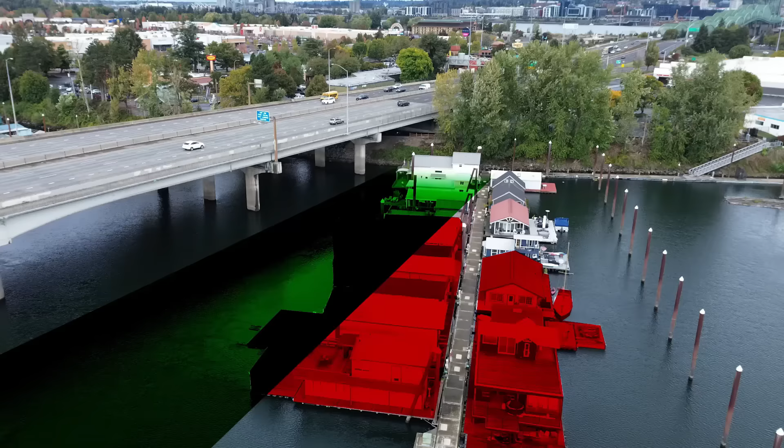I've been all around the country. I had never heard of floating homes until I got here. It's Greg Johnson's job to lead a team who are trying to make the impossible happen: fix Interstate 5 between the states of Oregon and Washington, which is kind of a big deal because 3 million people only have 2 bridges.

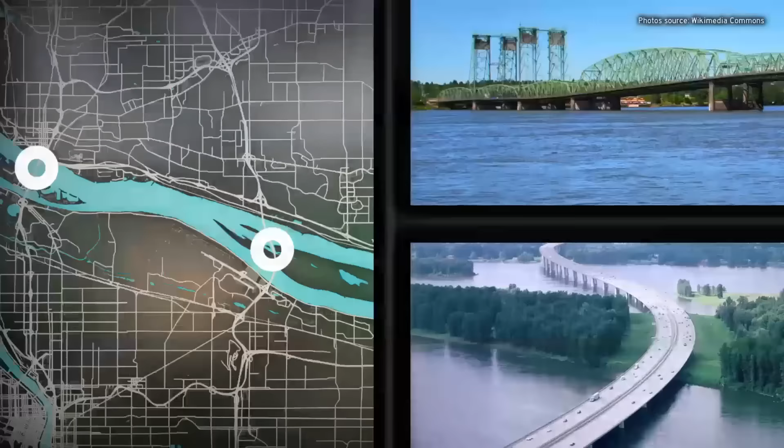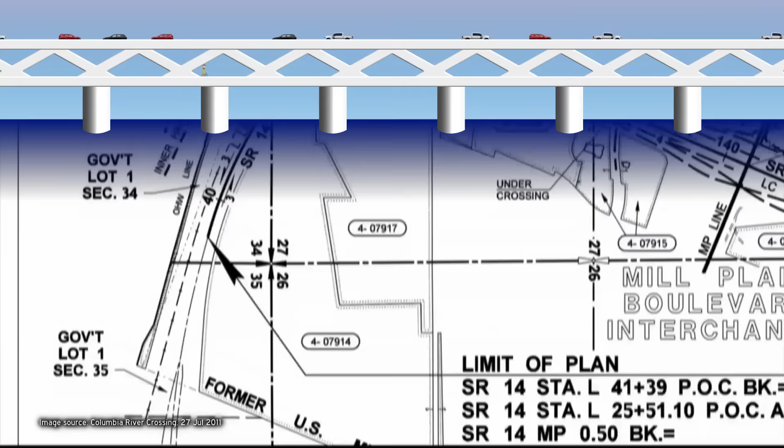A modern one that's about 40 years old that carries Interstate 205, and this one, the I-5 bridge, that just turned 108 years old. And the last time the 2 states tried to replace it, they spent 9 years and $175 million on engineers, architects, geologists, archaeologists, planners, everything necessary to plan out a mega project, only for Oregon to hate the road widening part and Washington hate light rail so much, the state Senate backed out and the whole deal fell apart.

So about a year ago, we talked about all the problems with this old bridge. It might look really cool, but it's not very cool to drive on. Only 3 squishy lanes in each direction, and nowhere to go if you break down. An elevator for tall ships that stops the entire freeway. And if you try to avoid traffic and take your bike, this walkway is not great, and Portland's giant light rail system is stuck at the shoreline. So anybody living on the Washington side pretty much has to drive.

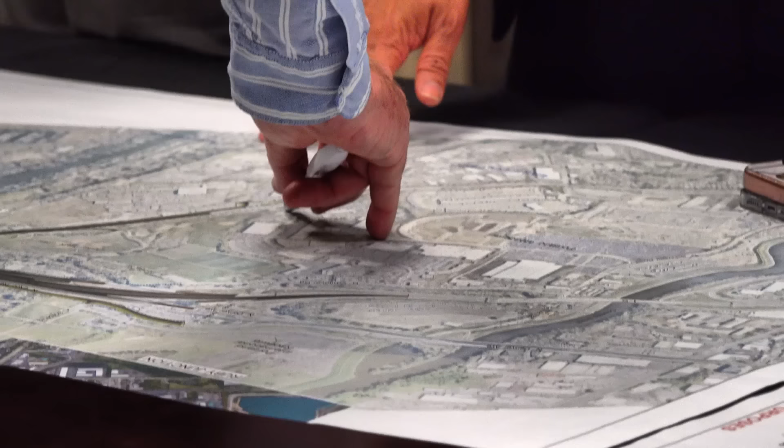2 states divided by a very large river, communities that see themselves somewhat differently. So here we go again. Can Portland and Vancouver bridge their differences with a little help from the team committed to make sure history doesn't repeat itself? This is the 20-year story of 2 states trying to replace this old bridge, and why this time might actually happen.

Our problem is they are right next to the interstate. The Jantzen Beach floating home community is just one of hundreds of issues a mega project has to sensitively deal with if they want to get the project built. Jantzen Beach here on Hayden Island has kind of gone out of business twice. The island sits in the middle of the Columbia River, just off the Oregon shoreline. A century ago, right over there was the Coney Island of the West.

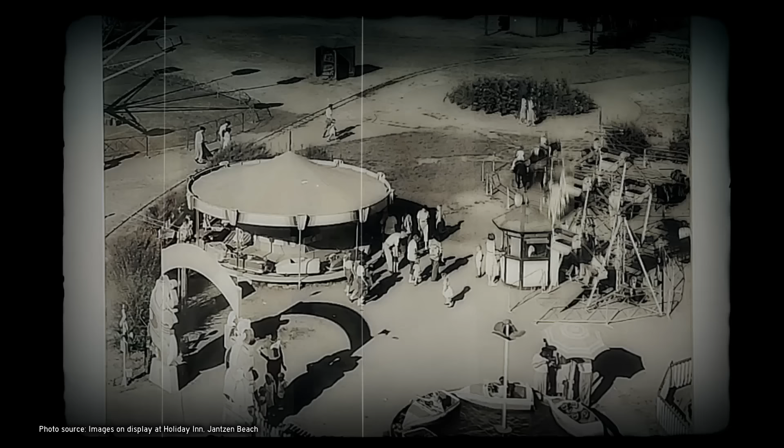During the 1930s, 25,000 people a day would come to ride roller coasters, and by the 1960s, Interstate 5 rolled right past the front door, which meant the only way on and off the island was the freeway. Floods, fires. By the 1970s, a shopping center developer tore it all down and built a big enclosed mall over there. But even it's now gone out of business. Blame it on the traffic, I guess. Today, it's a big box development, but one that's starting to see a little bit of vacancy itself.

So if you're going to build a multi-billion-dollar highway project that runs right through the middle of the island, now's the time to get it right. Sort of a make or break, so Jantzen Beach doesn't go out of business a third time.

Well, now it's 4:07. You get traffic and weather.

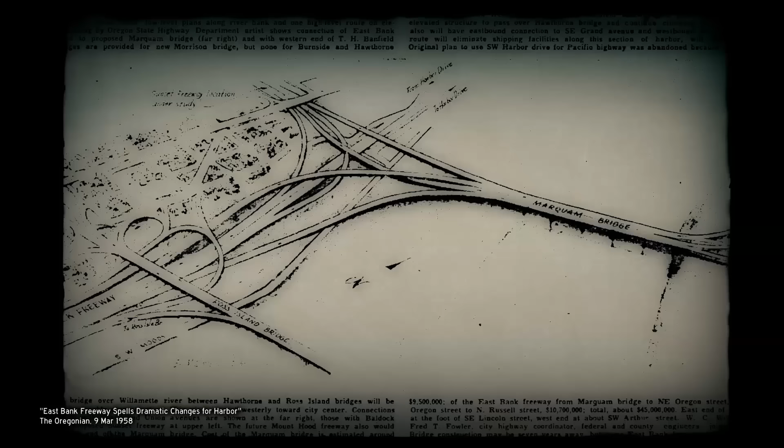People say, well, my voice doesn't matter. They're going to do what they're going to do. This used to be true. Before 1970, one small team of engineers could just draw a line on a map, and construction crews would start building. But history has shown us that when a small group of people just do things without any input, they usually end up making some colossal mistakes.

So Congress passed a law that said, hey, taxpayers are footing the bill. They should have some say on what gets built. If you make changes to a road and there's federal money involved, rules say you have to document the impacts. They call that an environmental impact statement. And I just saw this on the side of I-5. Public comment period open. Getting involved with the community and finding out what they want. If you're doing the project right, it's a lot more than just a formality.

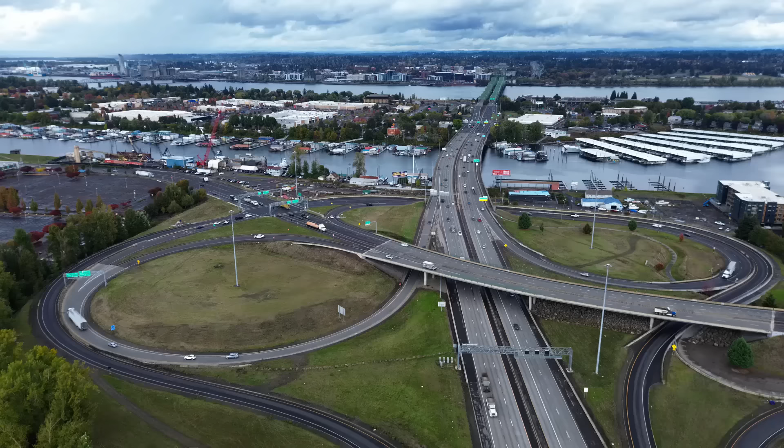So a decade ago when Oregon and Washington tried to build a bridge, the design had it landing on Hayden Island and spreading out to 22 lanes, which is a little eye-opening for the residents. Thankfully, public involvement picked up on this. We listened. They said they wanted a smaller footprint, and they also wanted a way to access the Portland street grid without going on the freeway. So through small meetings and big ones like this one, residents worked with the team to redesign the interchange.

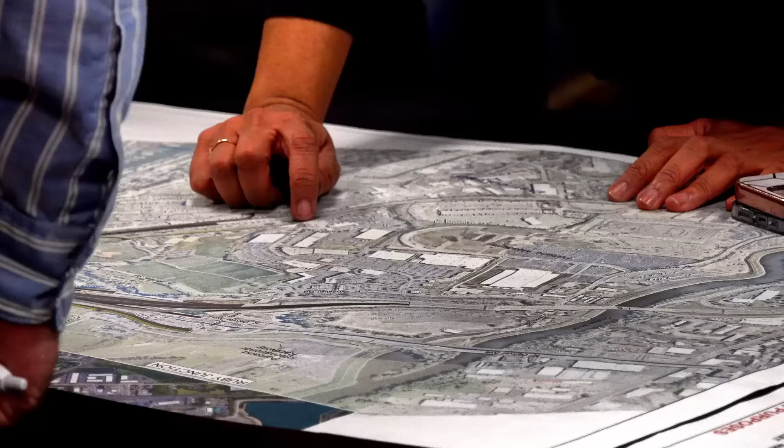Traffic to and from Oregon would use this new city street bridge instead. The freeway can still move a lot of traffic without being quite so wide on the island, and it might save a few of those floating homes as well. But that's just the first of many issues.

We can save people time by adding new lanes. Plus, it would save $2 billion, including the need for tolling. We have a lot of folks on the Washington side who are convinced that building more lanes is the answer. Or on the south side, they're saying, no, we want as small a bridge as possible. Good with the bridge replacement. We'd love to see a whole lot less freeway and asphalt in this project.

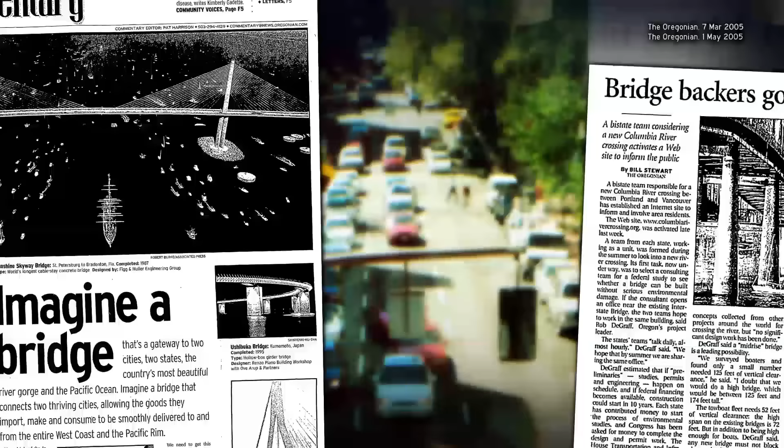And this cultural divide may have played a role in tanking the last serious effort to replace this bridge about 10 years ago. It's different here. 94.7 Alternative Portland. Back in 2005, both states started public involvement, and the Columbia River Crossing team, well, they looked at pretty much everything. Building a third bridge somewhere else, building just a transit bridge, digging a tunnel, or doing nothing at all. And after probably about 1,000 meetings, came up with this design.

The federal government would pay for the transit, tolls would pay for half of the freeway component, and the states of Oregon and Washington would put up $450 million each. Oregon approved their money, Washington didn't. And that killed the project, until now. I suppose putting a multi-billion-dollar road project together is kind of like balancing a tightrope. If one side gets everything they want, nobody gets anything at all.

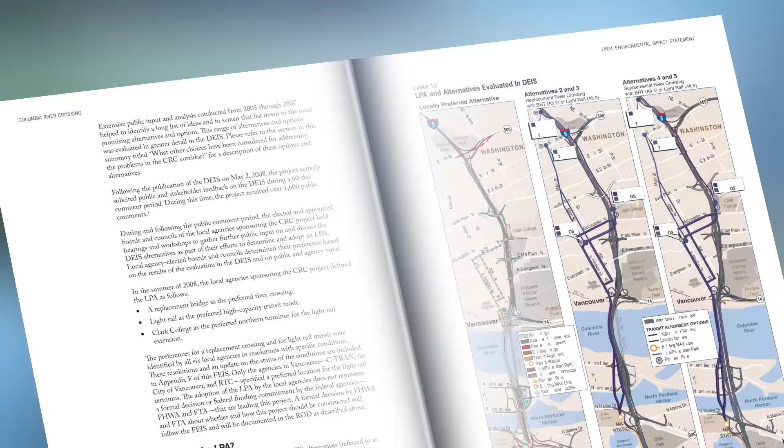The project may have died, but the need for the bridge hasn't gone away. In 2019, all the parties came back together to try again on the Interstate Bridge Replacement Program. And thankfully, attitudes in the Northwest have seemed to be changing. How? Well, maybe just another decade of having to drive on this thing or not have light rail on this thing has softened everybody up. So the goal now, salvage as much of that $175 million worth of work from the Columbia River Crossing project, update it, and push it across the finish line.

Some things have changed in the 10 years since that program went dormant. Now both states have put up $1 billion committed to this effort. The challenge now is not to balance two things, it's to balance like 100 different things, starting with the fight between cars and transit.

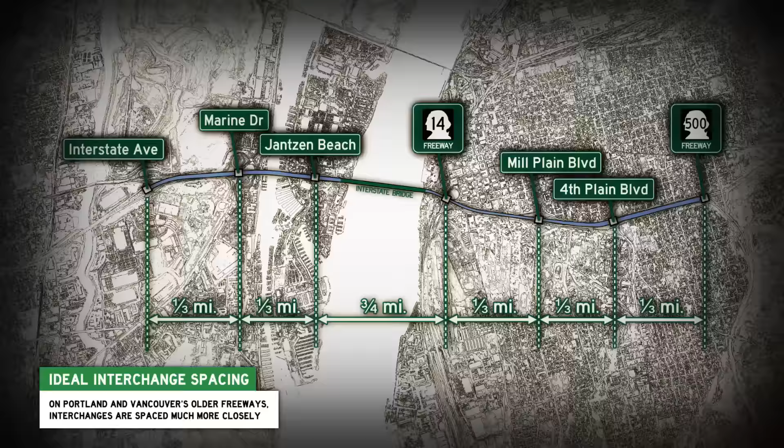7 interchanges so closely spaced, and people diving in and folks in through lanes having to stomp on the brakes to allow them to get into the flow of traffic. And so the rationale is, well, what's the point of spending billions on a brand new bridge if the traffic right next to it immediately just jams up. And an engineer's tool to help fix this is the auxiliary lane.

See this blue car here? They've got to merge over real quick because that lane is going away and all the traffic's having to slow down to let them in. Now imagine we added a new lane as you come on the freeway here, and that new lane runs all the way to the next exit. Well, now they have all that time to decide when it's good to get merged over.

If I only want to go from interchange to interchange, I don't ever have to get into that flow of through traffic, and it disrupts how those folks are moving. We have a tendency to build aux lane connecting to aux lane connecting to aux lane. But if you have 5 miles of auxiliary lanes, you have added an additional lane. Well, if you can get on at Marine Drive and get all the way to 4th Plain, that feels like a through trip to me.

As strongly as freeway widening opponents feel, none appear ready to tank the project over it, as long as there aren't too many new auxiliary lanes. I know many partners have been very clear that 1 is the most that is acceptable to them and that 2 opens the negotiation again. I would add my name to that list. So I guess that's progress. We were debating between 12 and 10 last time. Now we're debating between 10 and 8.

But being an interstate highway, cars will be a compelling part of the decision-making here. There's a certain philosophy that, we'll punish people out of their cars. Now, if someone can show me anywhere in the United States where that has worked, I'm interested. So how does this all balance out with people who ride transit?

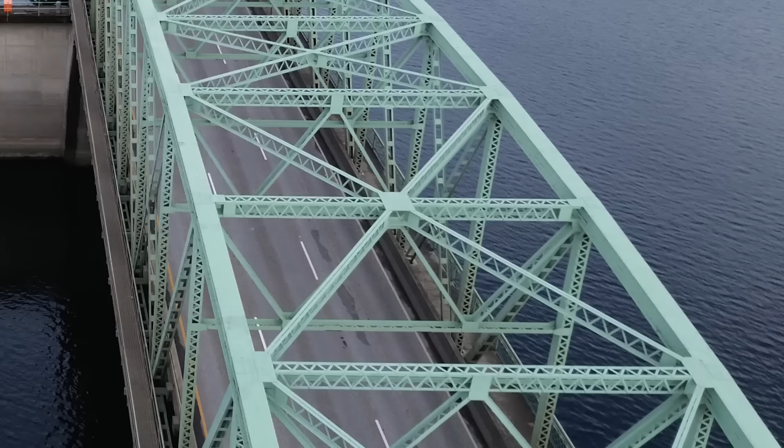Right now, the MAX light rail trains stop about a block from the start of the Columbia River over there because there's no room, obviously, on the bridge to carry light rail trains into Washington. In fact, there's not even room to carry these vehicles onto Hayden Island. And in almost every iteration of the bridge, adding some light rail tracks to connect in another 500,000 residents really just makes too much sense. We have one opportunity to get light rail across this river. If we don't do it now, it will never happen.

The way the plans look right now, a brand new bridge just for the train would carry this to Hayden Island, where there'd be a stop at Jantzen Beach. It would then join the big new bridge into Washington, where there'd be stops at the waterfront and then one at Evergreen Boulevard. And that's where Washingtonians get their biggest present of all.

From that final MAX station, people would walk out here over I-5 onto a big city park that would connect the downtown side with the Fort Vancouver side. That's called a freeway cap. It's like a little tunnel that all the cars would drive underneath. And it connects the city back in a more meaningful way to Fort Vancouver.

This is a project this city really wants, probably could never afford to do it. Would be a huge, cool project in and of itself, but it's almost a tiny footnote, a little detail. Gives you an idea of just how enormous this Interstate Bridge Replacement Program project is.

And having tens of thousands of passengers hopping on and off of trains all day long next to Vancouver Central Business District, well, that's got to be good for economic development. And you can ride from one downtown to the other and stay in the same seat. And that's enough to win over some of the highway expansion skeptics. I am willing to stomach a lot in order to get light rail into Vancouver. That is one of the North Stars of this project.

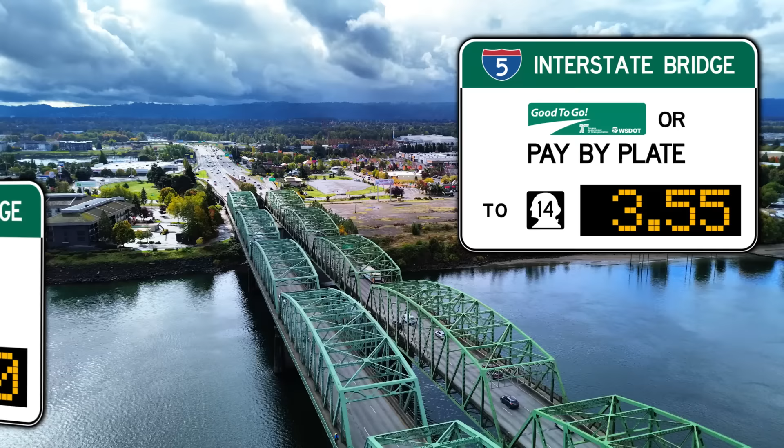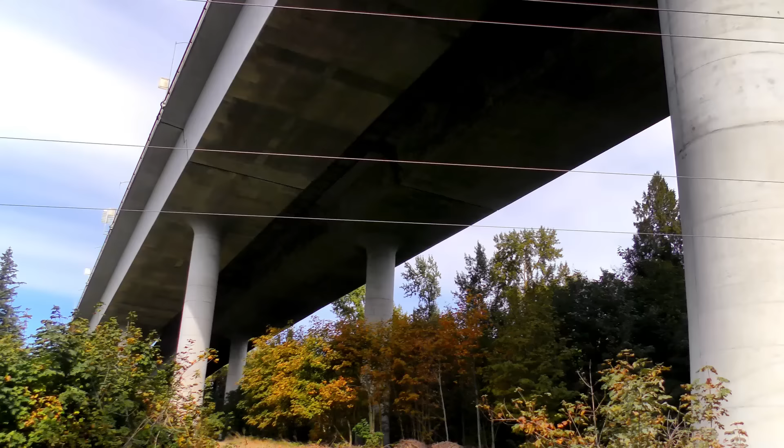But tolling will start on the old bridges the moment the project is approved. The price of the toll would stay low at night, so perhaps as low as $0 on the old bridge, and then that price would start bumping up higher and higher during the day to keep traffic flowing on the new bridge so it doesn't jam up. It also means some drivers will start using Interstate 205 instead, because that bridge is free. Now, planners had considered putting a toll on that bridge too, but Washington State passed a law making that illegal, and Oregon's DOT tells a local TV station they have no plans to toll the 205 bridge.

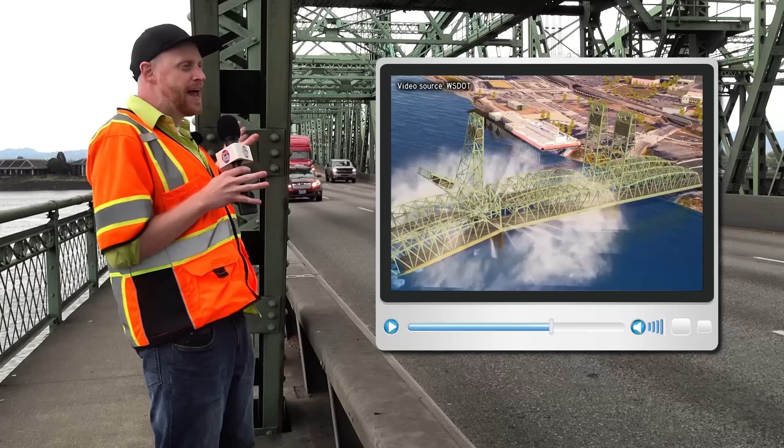With all the potential for disagreement, there are like two things everybody agrees on. One, this old bridge is bad because even in a moderate earthquake, we're all going down into the river. Especially the century-old lift towers. And on that point, two, anytime a boat that's slightly too tall has to come by, they have to shut the entire freeway down and lift this section up in the air. It stops everybody. So what does a mega project do about those really tall ships? Well, they could just build another bridge with an elevator.

We're studying it in earnest to make sure we know all of the problems or ins and outs if a movable span is required, but that is not the desire of the users at this location. Now, don't get me wrong, the mechanical intricacy of this lift is pretty amazing. But there are certain things you want to be unique at and number one at. Movable span is not one of them. And so if we're serious about getting rid of these terrible lifts, then this bridge has got to be taller, right? It's got to be a lot taller.

The current bridge will open to 178 feet. We have not had a need for that height of opening for approximately 10 years. But when they do need it, they need it. So I'd say, well, the sky's the limit. Just build the bridge really tall so all the ships can go underneath it, right? But there's a problem. There's an airfield right here. So what about the people who fly airplanes? And who in their right mind would put a tall bridge right next to an airport anyway?

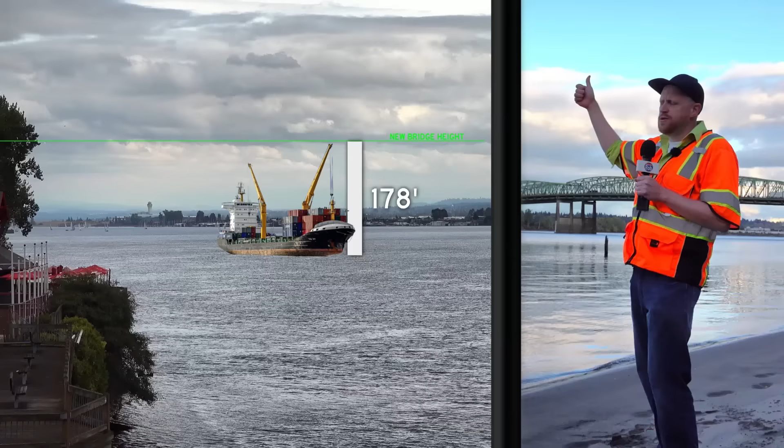We are grandfathered in because that bridge is so old. It preceded Pearson Airfield and PDX. So we can't build the awe-inspiring cable stay or suspension bridge because, once again, we'd be poking up into that airspace. And this pits airplanes and boats against each other. It becomes a vertical sandwich, right? Because you want 178 feet down below for ships to clear it. But that pushes you into airspace for planes. And then the plane stuff pushes it back down. Well, at one point 10 years ago, they were down to only 95 feet of vertical clearance for ships, which was definitely not enough.

It looks like boats and planes might be able to settle on 116 feet. But even at this compromise height, it's still not tall enough for the biggest boats. Here's where they get really clever. Instead of fixing the bridge to accommodate the tallest possible ship that might need to go underneath, what if instead they identify and find the tallest ships that do go underneath and then work with their owners to try to shorten them a little bit to fit under 116 feet?

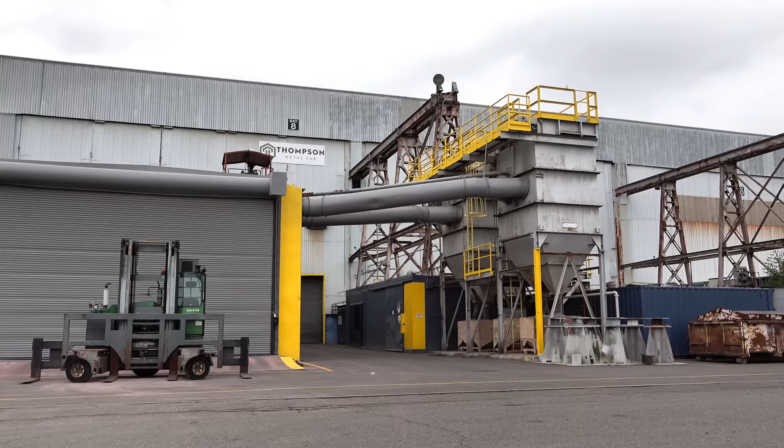We have 5 ships that would have to be altered. Either their antennas are too high or they have cranes or booms on those vehicles that would have to be altered. So for instance, one of the companies that fabricates and builds large objects here and sometimes wants to float it down the river, what about moving them down past the new bridge so that way they don't ever have to go underneath it? Can you take a part of your business and move it on the downstream side and put the big things together, and then you have no restrictions further up?

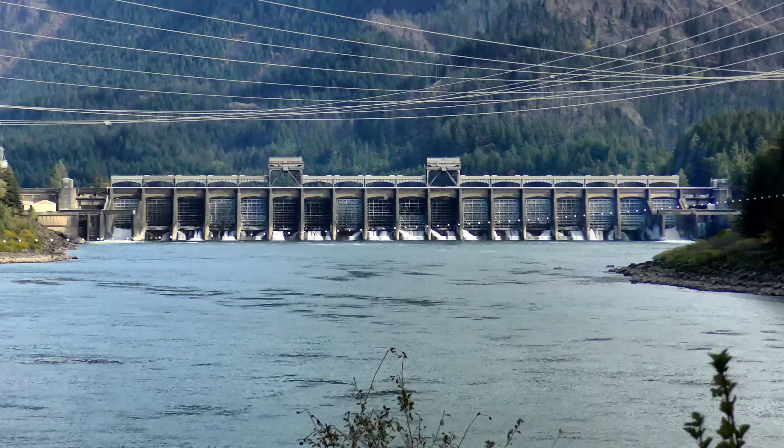And they won't have to worry about new factories bringing in new ships. Pretty much anywhere east of town is the Columbia River Gorge. Dams and locks that restrict the size of vessels that can go on the river. And the turnoff for the Port of Portland is long before the bridge. You're not going to see big container ships. Those type of ships don't go this far up the Columbia.

Okay, so what about the people who need to drive on this bridge while construction crews are spending a decade tearing it down and building a new one? Going to want to keep the old one open as long as they can. Now, if they build the new bridge off to the side this way, it starts getting into Fort Vancouver and the airport there. So plans show the new bridge drifting toward the west. And for Jantzen Beach, that's pretty serendipitous.

So we're standing a little bit to the west of the old bridge on the side of what used to be a hotel that a while back, I guess somewhat coincidentally, burned down. Flames raced through the old Red Lion Hotel in 2012, and thankfully the shopping center they wanted to replace the hotel with fell through, which makes the perfect launch point to push the bridge into Vancouver. Once the new bridge hits shore here on the Washington side, it'll land just west of the existing bridge, and then it curves to line up with I-5 right behind you.

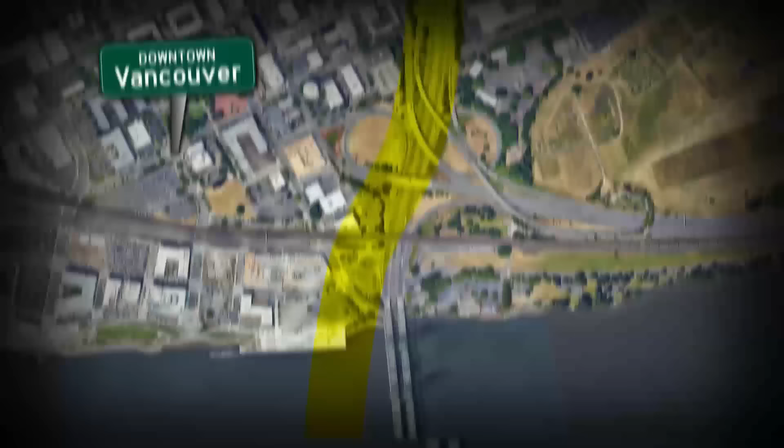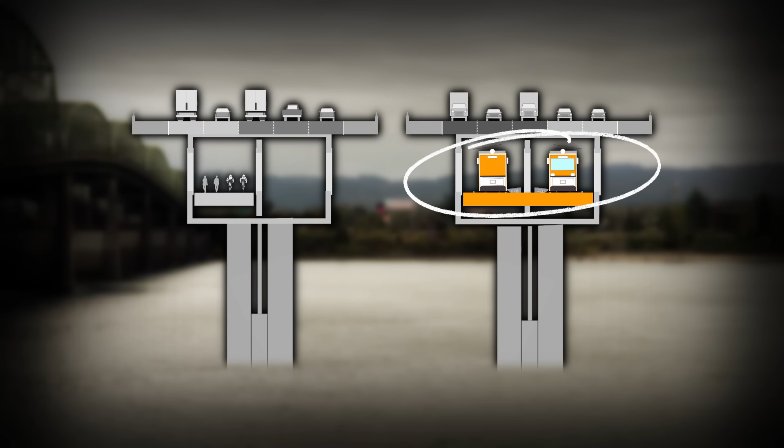And by the time you add in the light rail, all the car lanes, a bicycle trail, one of the downsides, it becomes tremendously wide. If they go double-decker, they can shave 100 feet off of that width to get it down to 170 feet. The design from a decade ago put car traffic on the top level. The lower deck had a light rail and a big wide pedestrian and bicycle trail. And being on the lower deck helped keep people out of the rain.

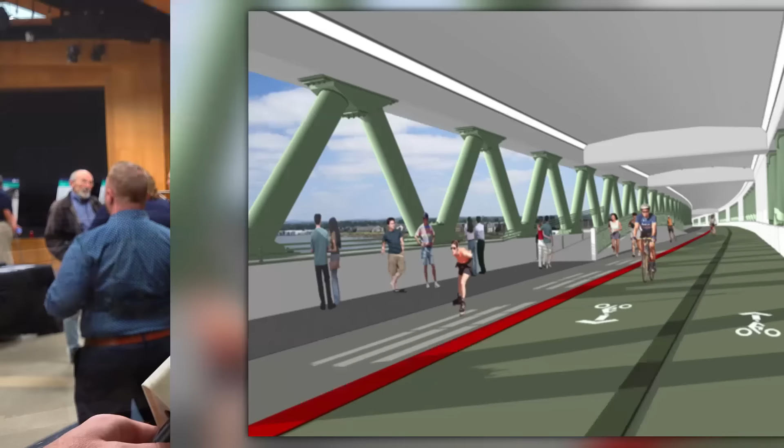So what about the people walking or riding their bikes who are scared that they're going to get mugged or something because they're on the bottom level of a double-decker bridge? I have not met any pedestrian or cyclist who wants to be in a cage underneath traffic. They think that, okay, I won't have eyes on me, and there's a potential for incidents away from the viewing of the general public. They might find allies from the fire department.

So what do you do if, heaven help you, you have a MAX train halfway across the river and it breaks down, or there's a medical emergency, or heaven help us, there's a fire, right? Because you can't exactly hop in your fire truck and drive on railroad tracks. The type of vehicles that the railroads use that have the wheels that can go on tracks and have regular rubber tires as well. We would have to have vehicles like that for emergency access. The IBR program would have to fund that type of equipment probably in perpetuity. Even more reason to sour on double-decker.

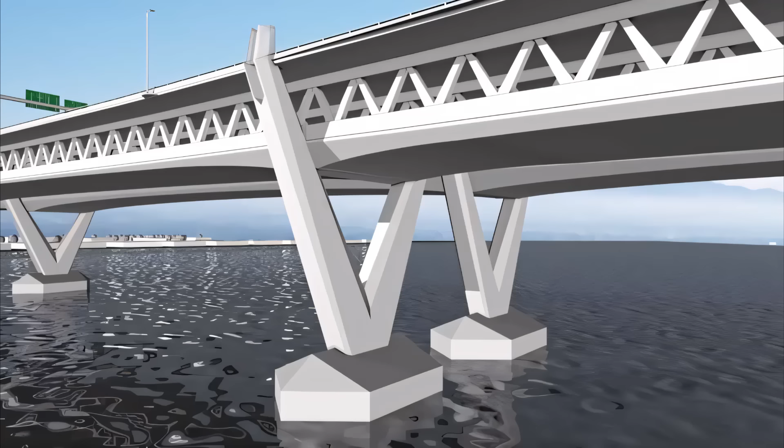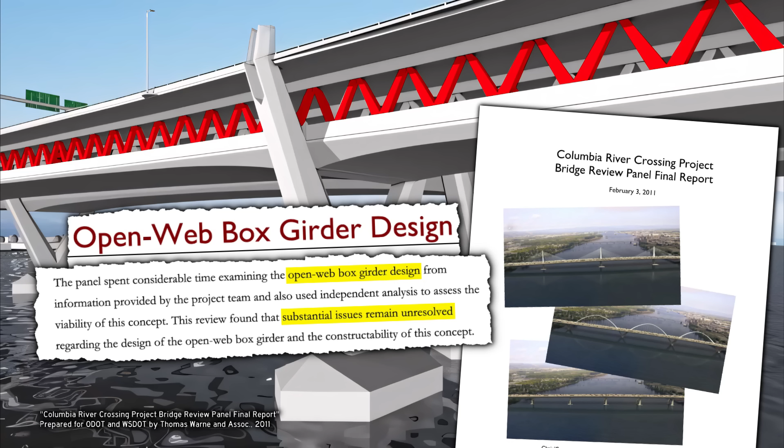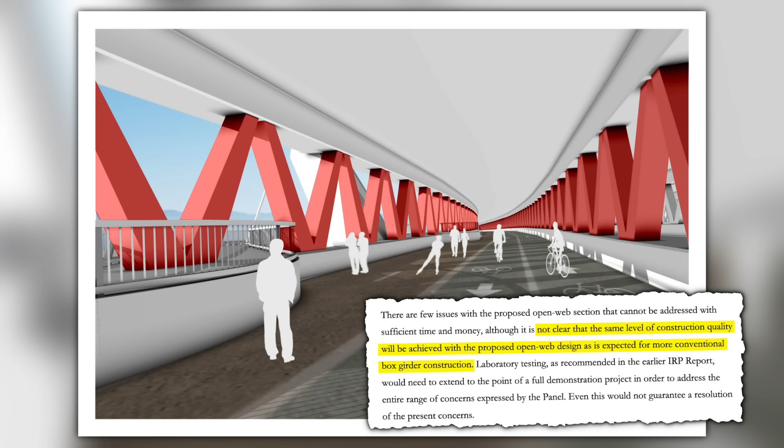The structure gets really complicated. In the Columbia River Crossing final report, the engineers investigating really criticized this shape between the top and lower deck, called an open web box girder design. It's pretty experimental. Normally a box girder design is hollow in the middle, but you only use the top part of it. This would use the inside as well, but they make the sides this really complicated see-through pattern to keep users on the lower deck from feeling claustrophobic. And the investigating engineers said with enough time and money they could make this work, but honestly construction quality would just be better if they did something more conventional.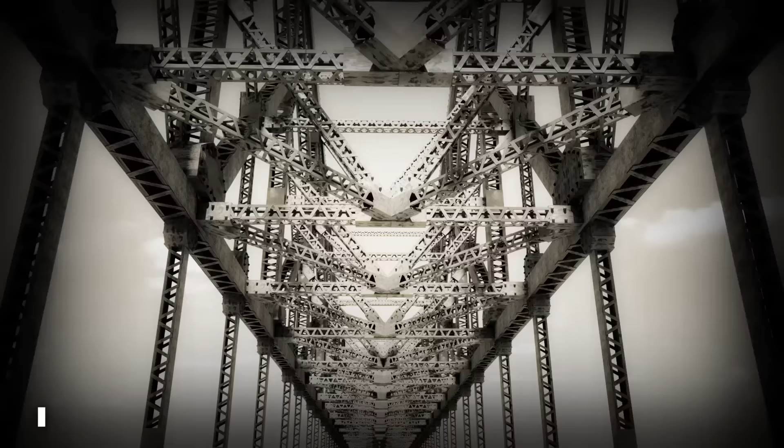Which means on the Interstate Bridge Replacement Program, if they do double-decker, it's going to be metal trusses. Truss bridges have to be painted eventually. They have a lot of bolting that has to be inspected. You do have to have folks going up there looking at it, making sure those girders are not cracking or rusting or doing all other deleterious things that girders do.

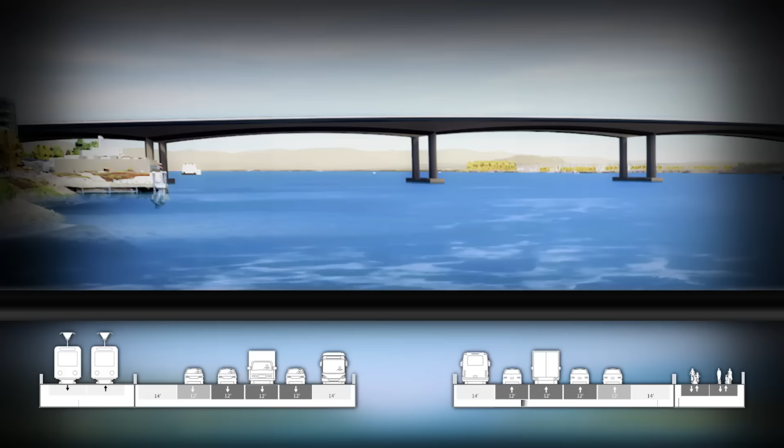It looks likely that a single level, therefore, is going to win out. Keep bikes and pedestrians happy, and make the engineering of the design a little simpler. If they can make the new bridge flat, all one level, now you open up bridge-type possibility. There are hundreds of little details that make a difference.

For instance, the new bridge, you're going to be a lot higher up in the air when you're walking or biking and you hit the shore over here. So getting people down in a comfortable way is going to be a challenge. So right now they're playing with the idea of having a big looping ramp. That way, one, it's not a slip and slide on a rainy day, and two, it's compliant with the Americans with Disabilities Act for people in wheelchairs.

Engineering has always been about trying to strike a reasonable balance. All the public involvement that the federal government requires should never have been a cynical hoop for engineers and planner staff to jump through. This is the process of how those that are stewards of our tax dollars and deliver projects to us get the information they need so they can actually build the thing that we want, and then, filter some of our crazier desires through the lens of engineering and planning best practices.

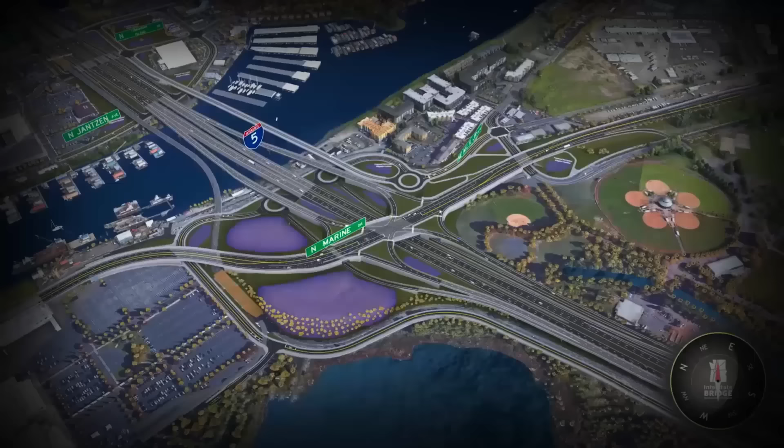By the way, I asked Greg, what's one overlooked feature that he gets really geeky and excited about? And it turns out it's the drains. We have over 190 acres of non-permeable surface that just drains stormwater runoff directly into the Columbia River. We're going to solve that problem. Instead, rainwater will pipe over to two large detention ponds on the Oregon side. That's where a complicated set of layers will pull all the junk out of the water. Filter out the micro rubber fibers from tires, all the oils and other fluids.

This well thought out but always imperfect project will be better for the ecology than what we currently have. Better for drivers than what we currently have. Much better for transit users than what we currently have. And walking or riding your bike, a whole lot better than what we currently have. The new bridge will be better, even if nobody is getting exactly what they want.

So how soon could this project practically happen? Well, most optimistic path, Greg says, he's hoping to see shovels in the ground by the end of 2025 with all the federal approvals they need, and Oregon and Washington happy. And at that point, they would turn from a planning organization, they're in that building over there, into a construction delivery organization. We want to see local contractors who have worked and plied their trade in both states for years. We want to make sure that they see themselves in this construction, and it's not just the multinational firms coming in and doing all of the work.

As you think about it, there's a contract for the bridge, and there's a contract for the approach roads to the bridge, and there's a contract for the light rail component. There are a lot of contracts. So even once this does get up and going, might be looking at a decade for it to all get done. But that'll be fun to watch, right? I know I'll be watching.